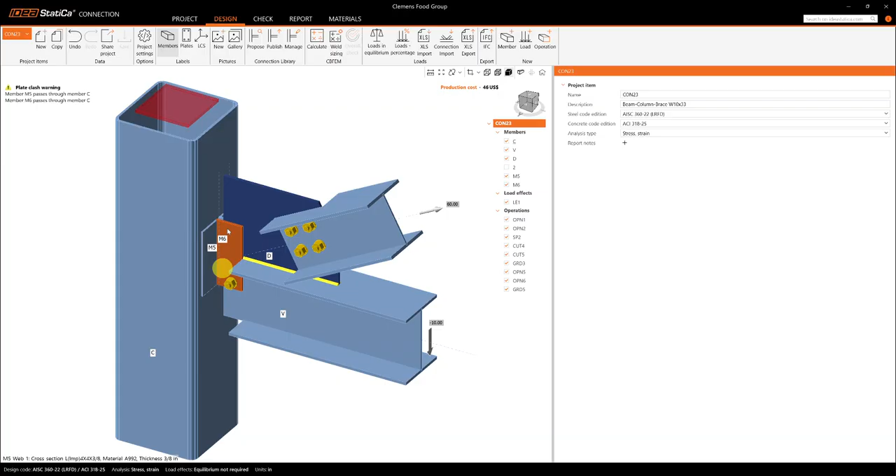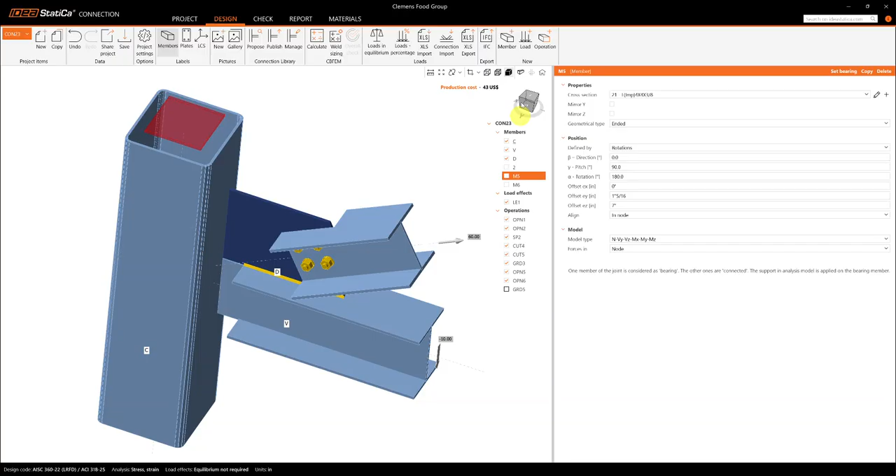Hello, so I'm going to show you how to add this clip angle or double clip angle connection to that beam and the gusset at the same time, right? First, I'm going to turn off these members because we don't model the connection elements using members. We use operations, okay? So I'm going to turn off those. I reviewed the other operations you have, they're okay, they are perfect, right?

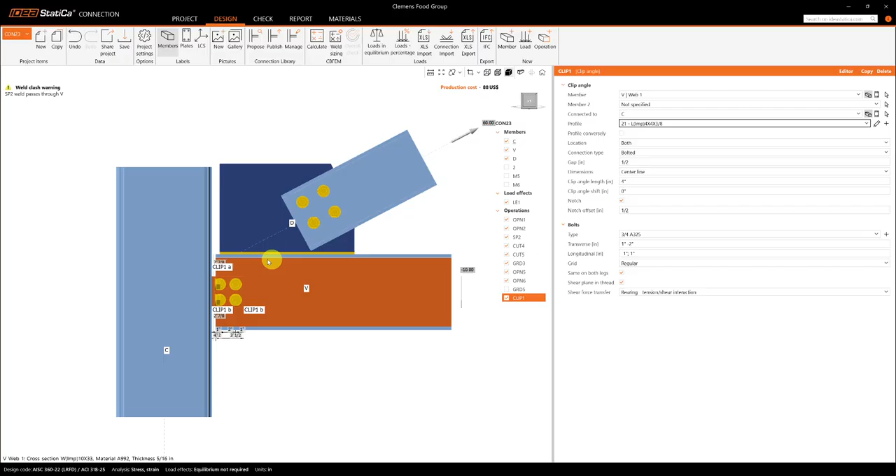So in this case, we're going to use the clip angle operation and then assign it to member V, okay? So I saw that you selected the 4x4x3/8. So you have it here. So I'm going to use that one. And I'm going to select this as welded, okay? Later, I'm going to add the bolts on this beam. I know that this should be bolted and probably this also should be bolted, right? So later I'm going to add those bolts.

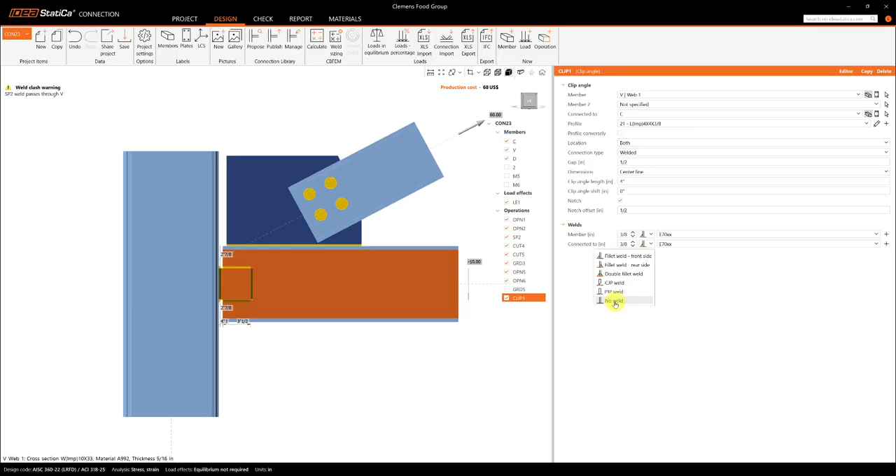For now, I'm going to keep it as welded and just turn off the weld on the beam element, not the column. So let me go back to this one here. Double fillet weld for the member. Sorry, no weld for the member. It's too long. Okay. Now with this operation, the beam is losing the openings that you created before, so no worries, we're going to use it, but I'm going to just turn it off for now.

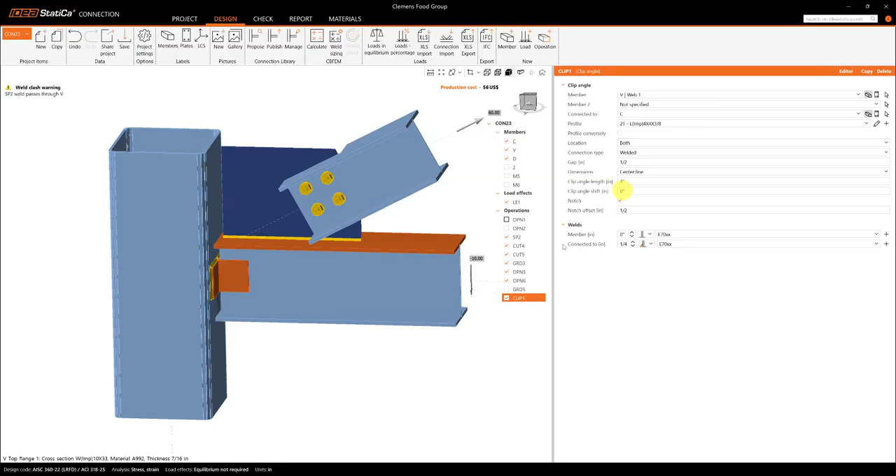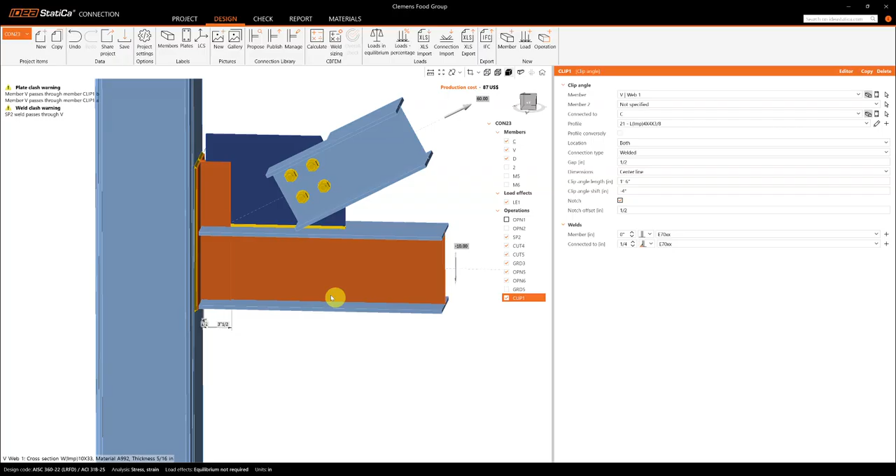Okay. So with this clip angle operation, it helps me to put double angles here, right? So we have them exactly where we need it. And then we can use this clip angle length. So I'm going to use 18 inches for that. And then I'm going to shift it. I'm going to use a negative value because this is related to this beam member. And you can adjust it using this input here. Oops, -4, something like that.

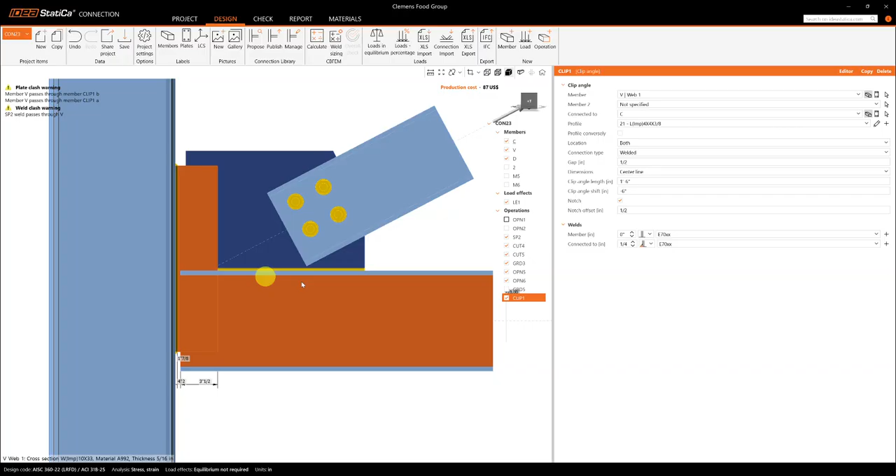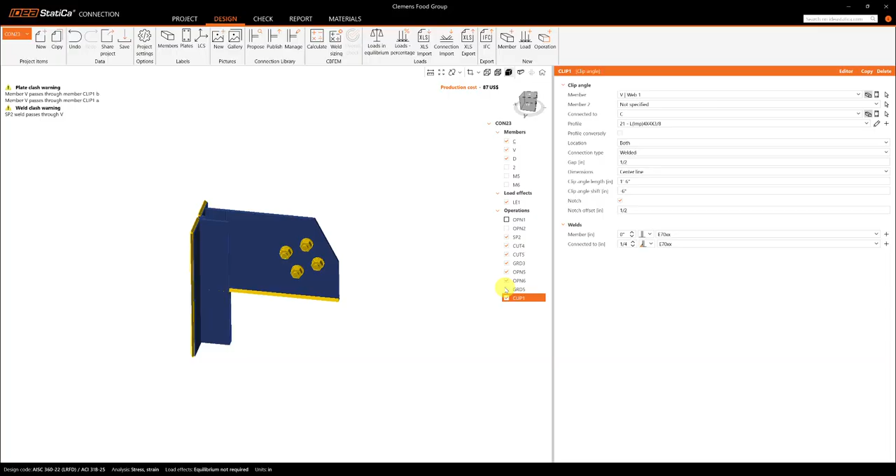All right. So again, we're going to reuse your openings that you created before. But remember that the order of operations matters. So after setting up this, we can copy them, right? So we set up the clip angle operation. Now the only thing that we're missing are the grid operations, right? So let me go ahead and add a grid operation here. All right. Then set it up from beam first.

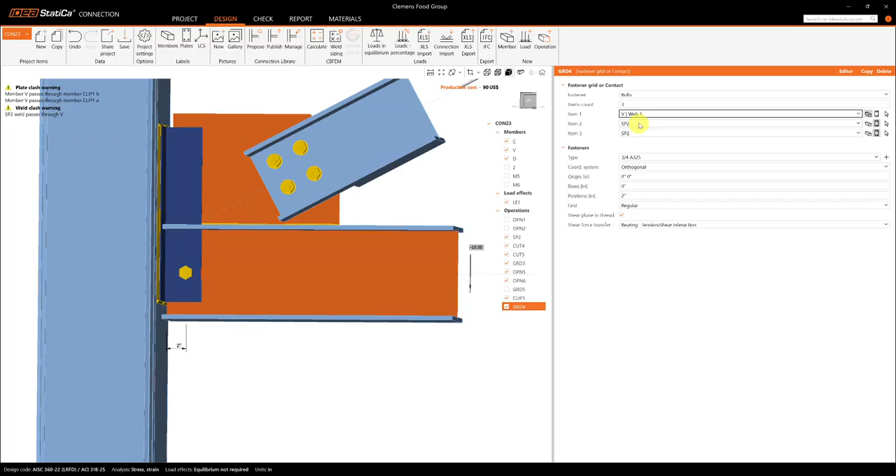So this will pass three plates. I'm going to select the beam web first, and then later these two clip angle plates. So this is clip B, clip 1B, so that's a member plate, and then clip B here. So now you can see that it's passing through these three elements. Okay. So now if we look at the transparent mode, we can see the position. Oops.

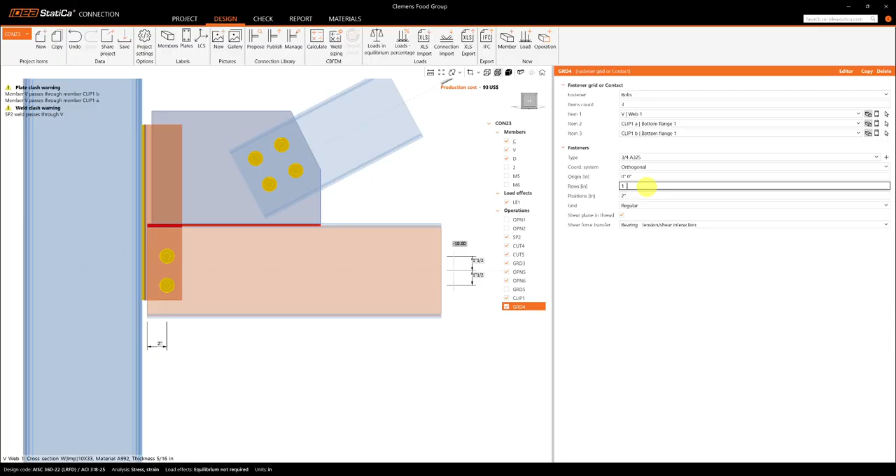2 is fine there. But the rows will be minus 1.5, so that is from the center line, so it's putting upwards. So I'm going to put it at a positive value, so it's here downwards. And then I add 3 inches. That will be negative. All right. So actually, I'm going to use 1 and -3. Okay, so we have that.

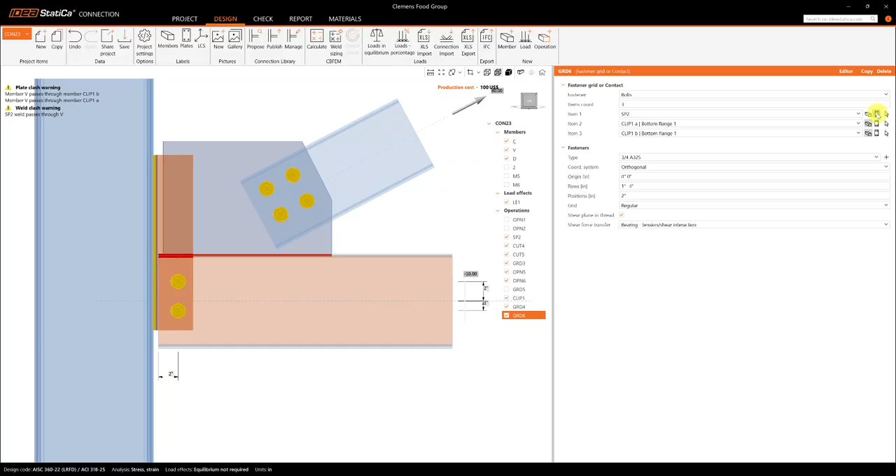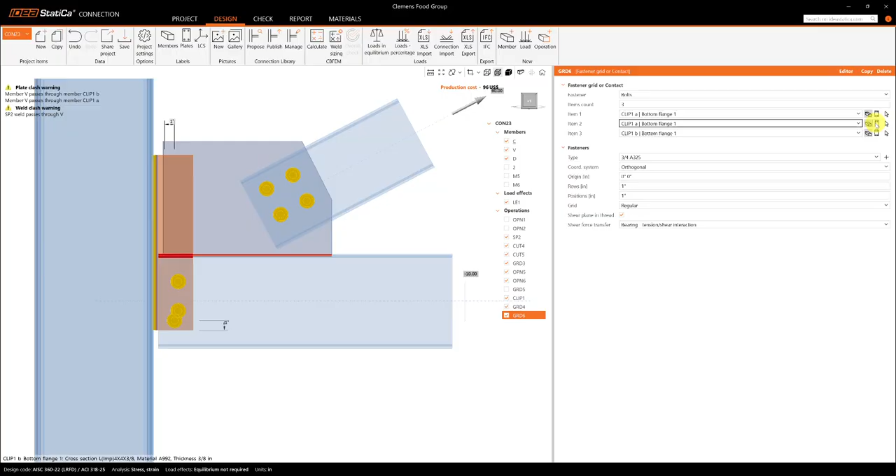Now we can use the same approach for the bolts here from the gusset plate and the clip angle. So I'm copying that operation. Now, instead of the beam web, this will be the SP2. But in this case, I'm going to select first the clip angle. Okay, let's put it at 1 and 1 so this is not confusing. Okay, so you can see it's here. It's related to the clip angle distance or starting point. So that will be clip angle. Then the second is going to be a plate. So we pick this SP2 and then clip B. Just selecting the 3 plates there, right?

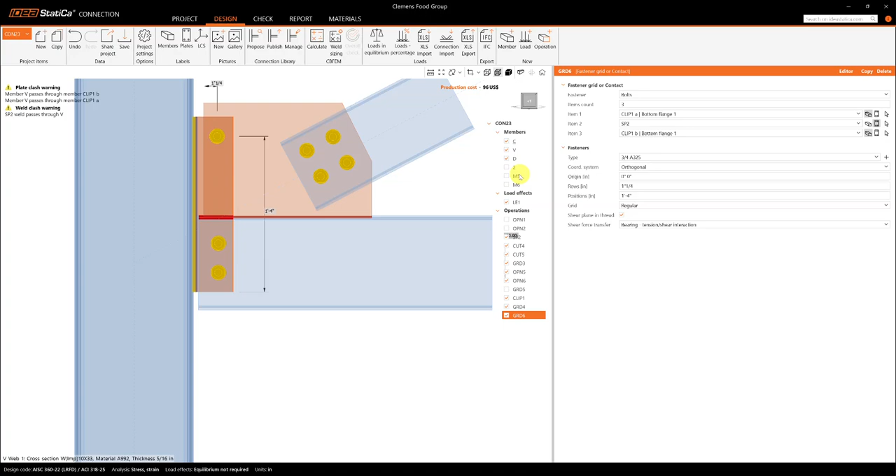Now we use 2 inches here. So it's in the rows, so it's at the same location, right? And then we use 16 inches. Okay, and then we say -3, and then -3. Okay, so again, you can use these operations to adjust the dimensions. And then finally, I'm going to copy these 2 operations at the end. And I'm going to activate them here.

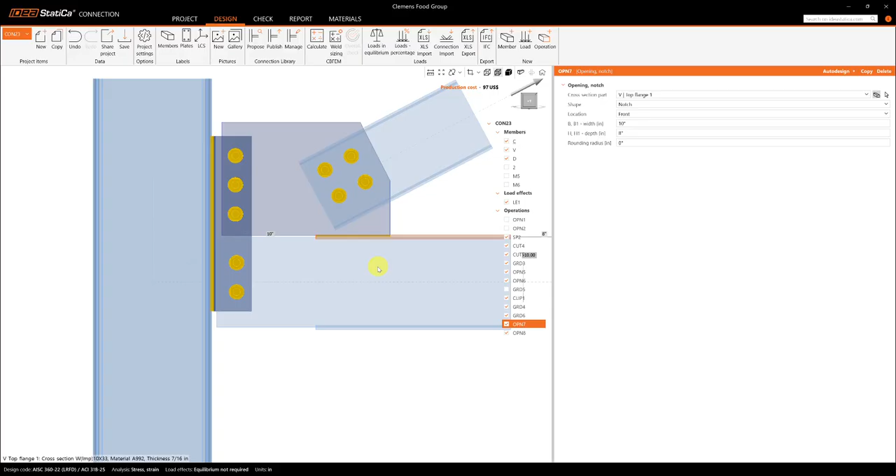I think we don't need that huge opening. So 4, and then for the opening 8, we can also use 4 here. Right? Okay, let me know if this helps.